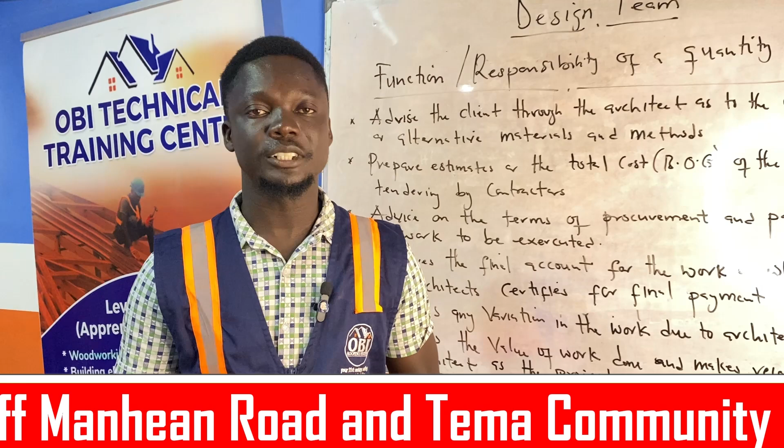We also came to know some responsibilities of the architects, that is designing the building plan and issuing it for preliminary estimates to be prepared. So during the design stage, the structural design, the architectural design, the MEP works, and any other works carried on during the architectural drawing are the responsibility of the architects.

During the selection of a contractor for the proposed project, it stands on what the architect decides. So we realize the architect is the head of the building team, and he decides who to give the project to after the tendering processes, after the quantity surveyor has gone through the tendering processes, interviewed individual contractors, and confirmed that this contractor is capable of doing the project.

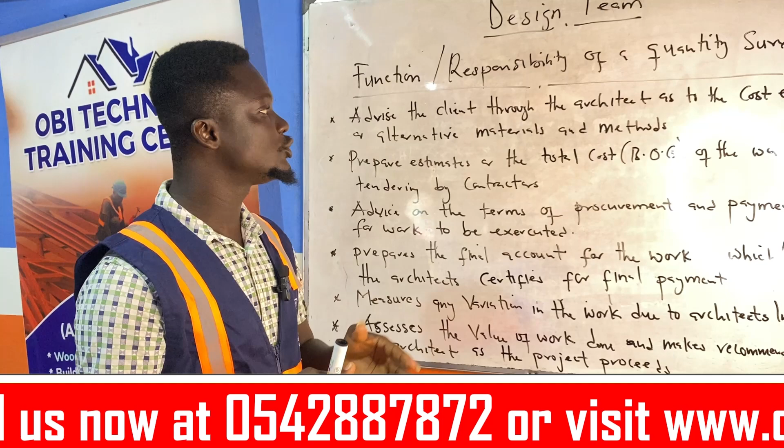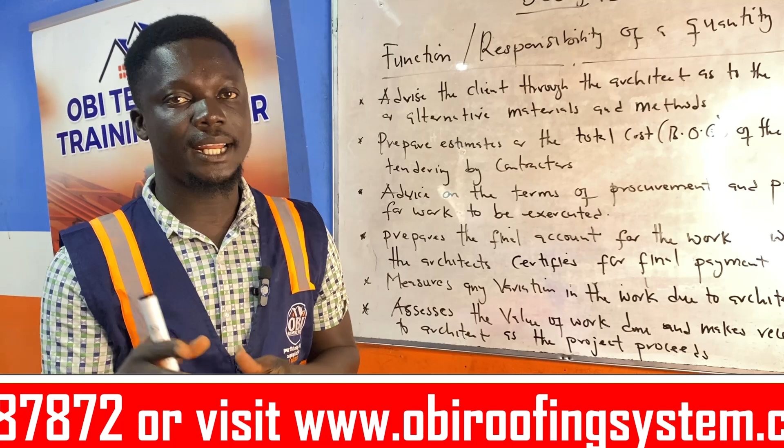Now we are looking at the real deal, the function and responsibility of the quantity surveyor. One, the quantity surveyor advises the client through the architects as to the cost effects of alternative material and method. It means any information the quantity surveyor wants to pass, the quantity surveyor passes through the architect to the client, and it's specifically based on the cost effect.

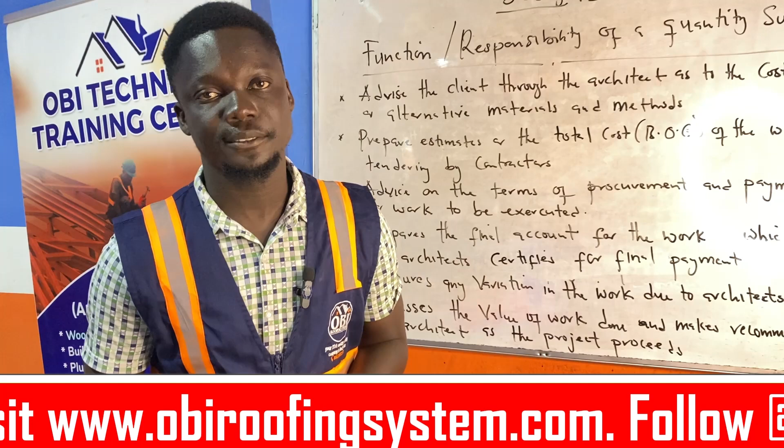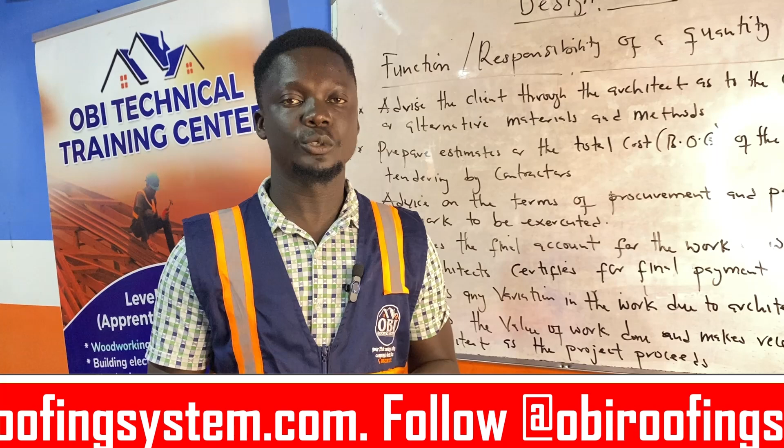For every construction project, there's a cost involved. Definitely you are going to buy materials, one or two, and it involves costs. We are going to buy material, either import it from another country, or it's manufactured here and used here. Through that, it goes through a cost process. We have transporting the material as cost, doing procurement analysis to know the quality and appropriate material for the work. It's all cost effects.

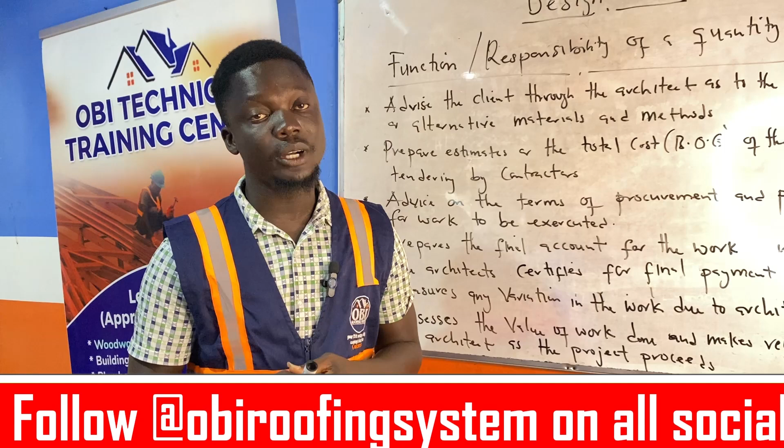One way or the other, we take transport to do the material search on the market, to find the best material for the work, and all those things go through cost, and it's part of the project cost. Those are under the preliminary cost, and it's part of the project cost, but just not part of the main work measured.

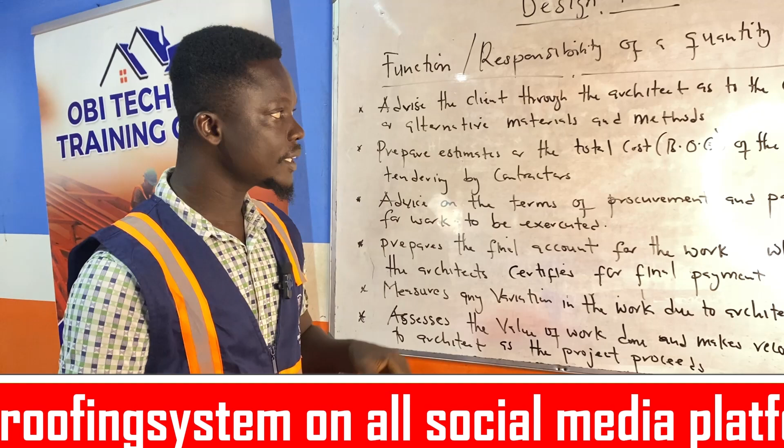So the quantity surveyor is responsible for advising the client through the architect on the cost effects of alternative material and methods. There can be a construction project whereby the architect has designed the whole thing to be a concrete structure. No block work, no other material, metal works, or those things. Pure concrete throughout from foundation to finish.

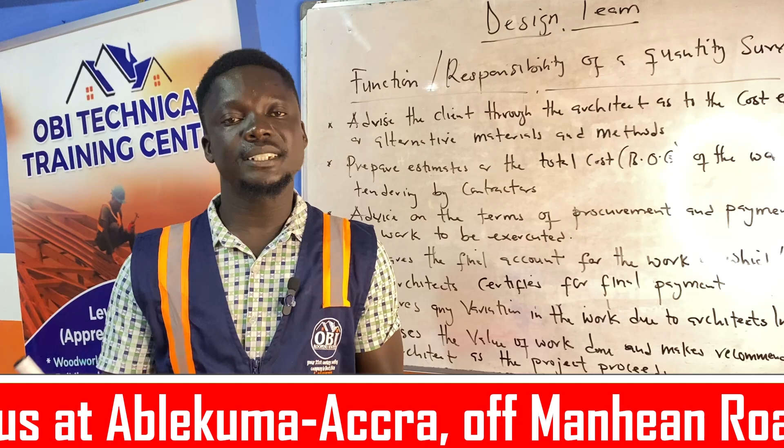By looking at the nature of the work and the material recommended by the architects, the quantity surveyor can sit down and do an alternative material research and realize there's another material that can fit the same functions and requirements of the concrete works, is less expensive, and can be used for the construction project, and we can save costs on that.

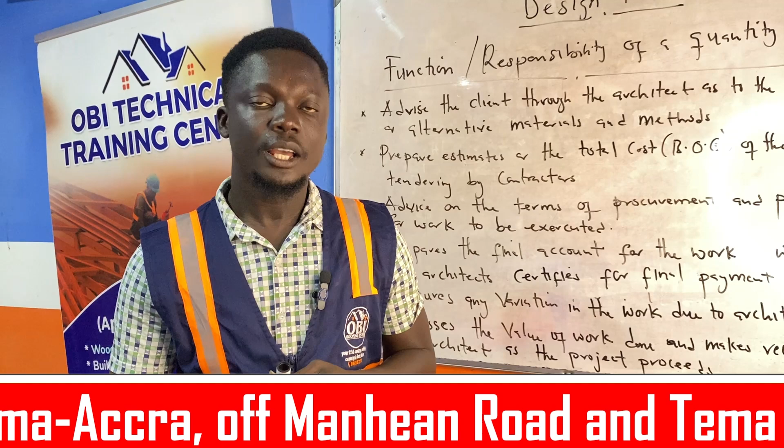So we look at those variations of materials, then the quantity surveyor does a cost analysis on this and brings it out to be approved by the architect and confirmed by the client, as well as the architect, for that material to be used. All these things the quantity surveyor does are purposely to manage the costs and make sure the client does not spend more money or waste money during the construction project.

And it's a very good thing because we help our clients to build, so that we help our clients to also save costs during the construction project and also choose alternative material to substitute the preferred material by the architect, which will perform the same function but will be less expensive as compared to the first one. So that is one responsibility or function of it.

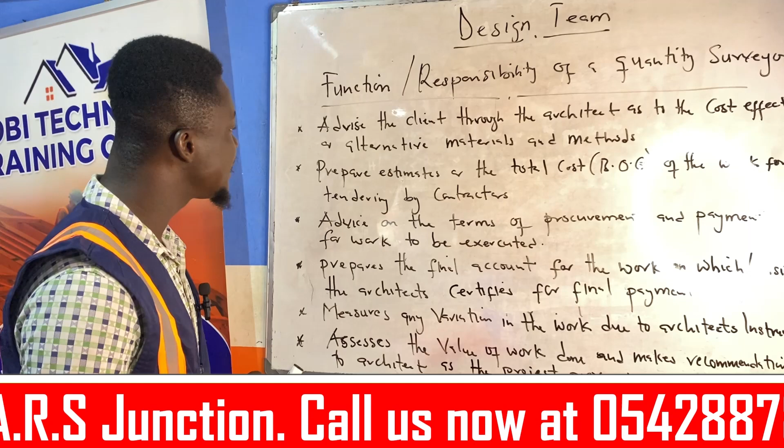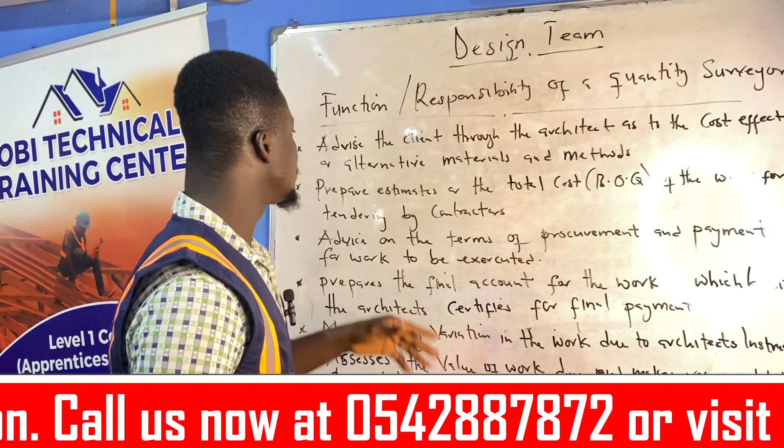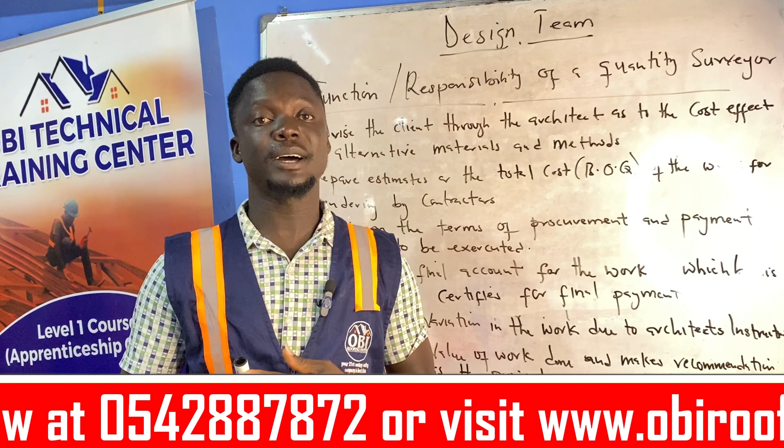Now, they say that the quantity surveyor prepares estimates or the total cost, that's the BOQ, the bill of quantity. The meaning of BOQ is the bill of quantities. So it prepares an estimate or the total cost, that's the BOQ of the work for tendering by the contractor. When we are preparing an estimate, it is prepared by the technical prediction of items of work to be used for the construction project.

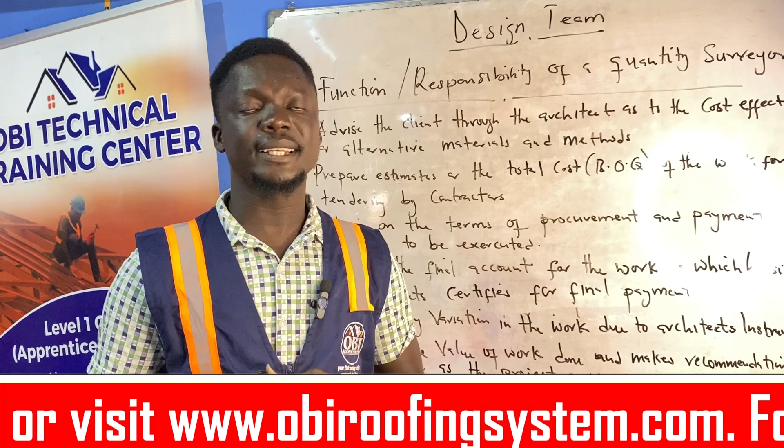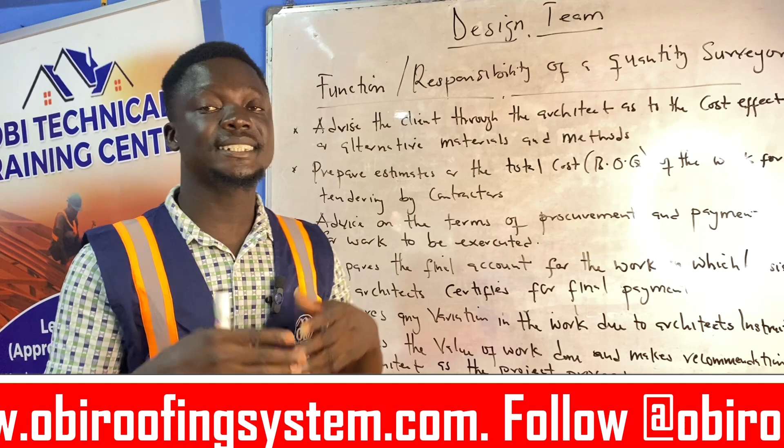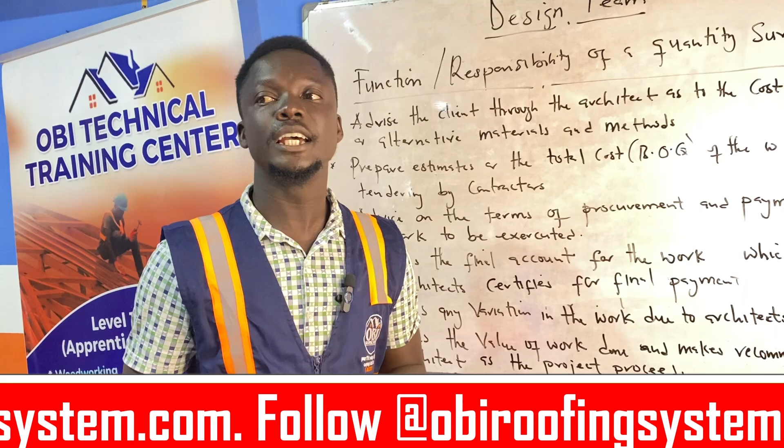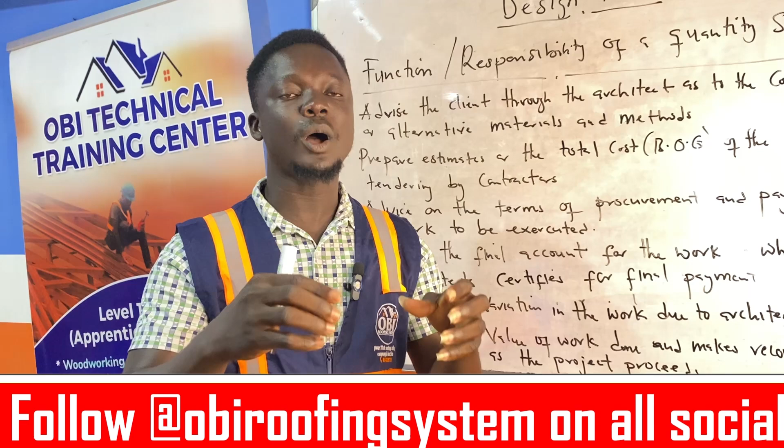But the bill of quantity involves some other items which are not in the estimate stage. Some of the preliminary contents or preliminary bills, like electricity for works, gas for works, transportation, on-site, off-site, money or associated funds related with administrative works, site photographs, site report preparation and all those things are cost items which cannot be found in estimation, but you can find them in the BOQ. So the bill of quantity gives us the total cost of the project, including the preliminary costs as well. But the estimate depends entirely on the exact work to be measured, or the actual measurement we picked from the drawing, and we do an estimate for it.

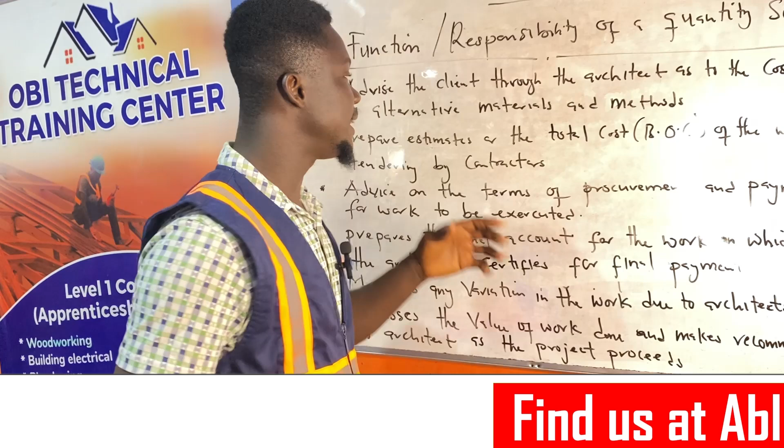And we do an estimate also to make a price analysis or rate analysis based on labor, material, plant, profit and overheads, that's the P&O. By the BOQ, we are able to get the estimate in it, getting the preliminary estimates, getting the estimate for the rate analysis to prepare the BOQ to get a rate or cost of an item.

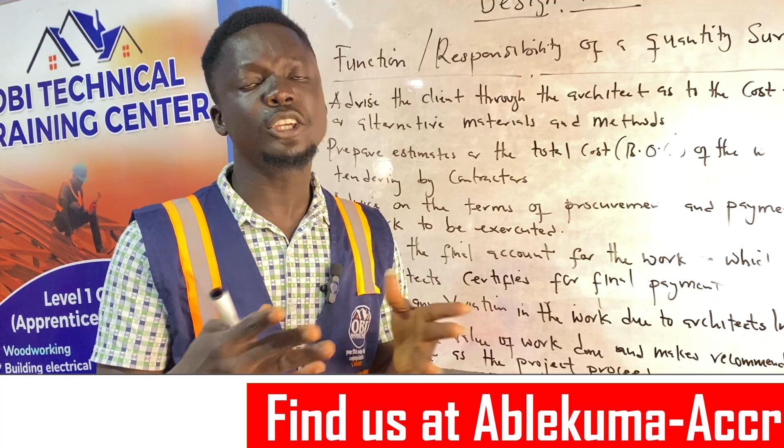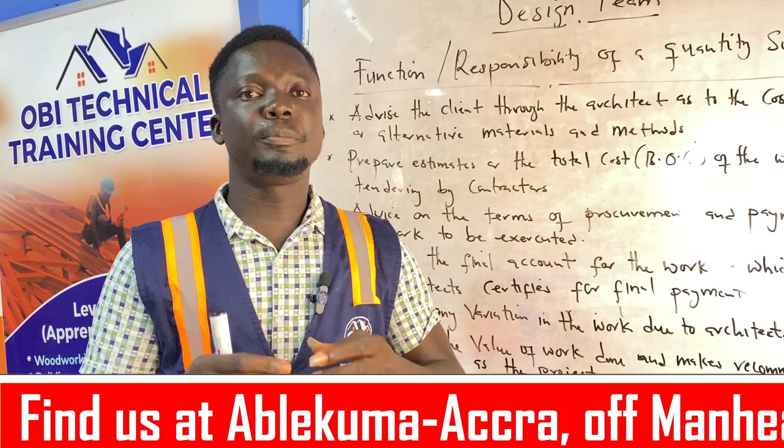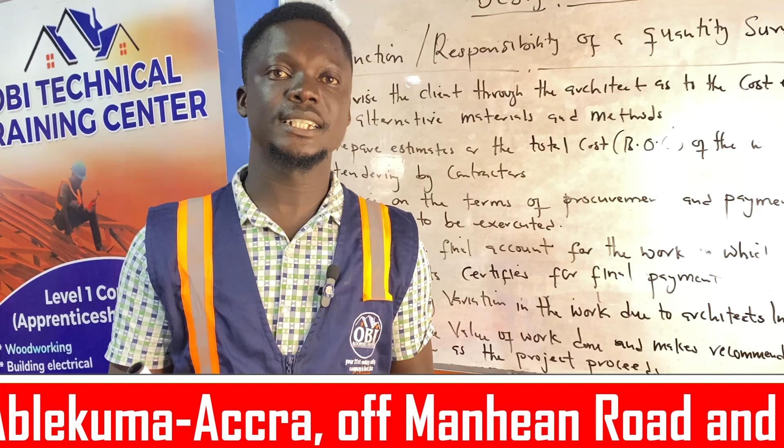Example, let's say the cost of 1 cubic of concrete. The concrete is made up of fine aggregates, coarse aggregates, a binder, either with an admixture or not. Now we prepare an estimate on the material cost, then we prepare an estimate on the labor for casting that cubic of concrete, and we prepare an estimate on plant or tools and equipment to enhance the work to be executed. Then we prepare an estimate based on the profit and overheads that will be obtained on the casting of concrete.

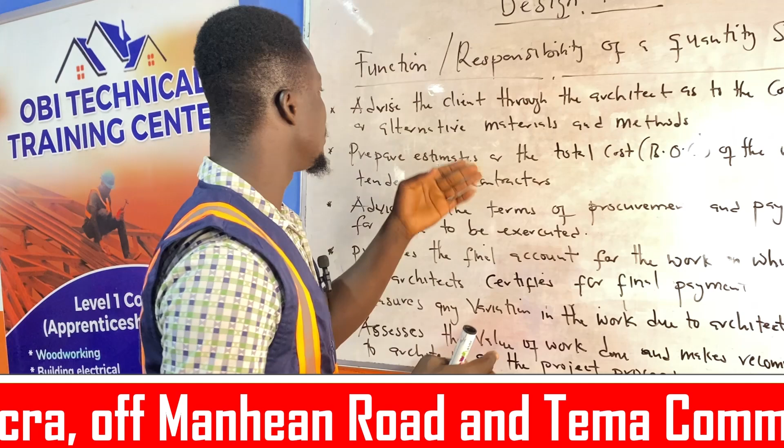I realize that there are two things: the estimate, and the total cost, that's the BOQ of the work, tendering by contractors. So after the architect has designed the building and the drawings are ready for contractors to tender, the quantity surveyor will sit back first and prepare a preliminary BOQ that will be used to cross-check the other BOQs that will be prepared by the contractors, or submitted by the contractors for tender evaluation purposes. So the quantity surveyor will sit, prepare the BOQ, and know the total cost of the project from foundation to finish.

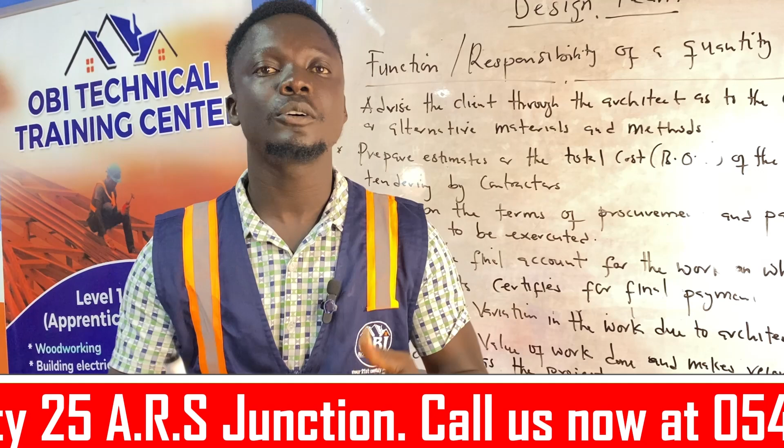Then after that, they give opportunity for other contractors to tender, and these contractors also have their individual quantity surveyors. After they get the drawing, what they will do is also go through the drawing and prepare a BOQ to be submitted. So when the BOQ is submitted by the contractor, the quantity surveyor is to analyze or evaluate the BOQ which is submitted by the contractor, and compare it to the preliminary BOQ prepared by himself, on the client side, in order to do the selection of the contractor.

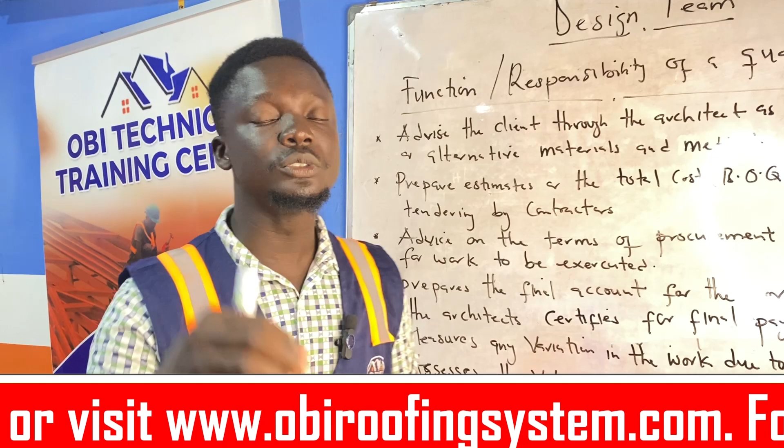So those evaluation and tendering processes will be assessed by the QS, the senior QS, the architects, and other engineers who are part of the building team. Then through that, they will be able to know the qualified contractor who is qualified to take up the job.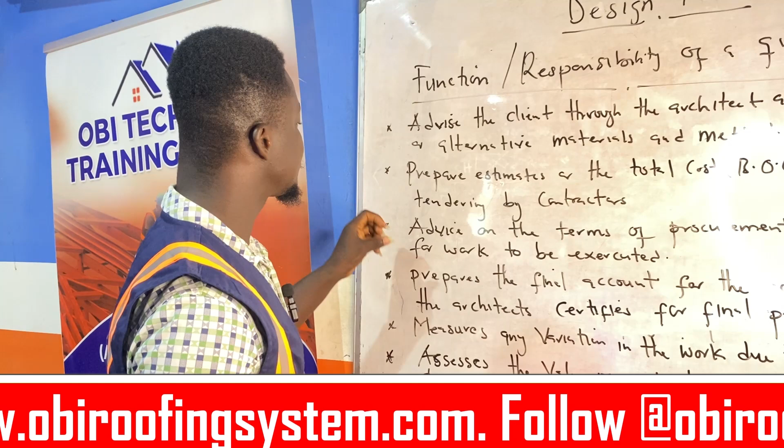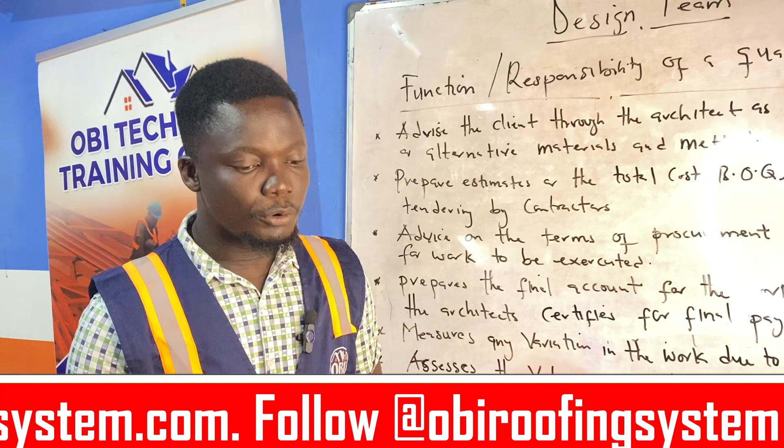Then now let's go to the next one: the quantity surveyor advises on the terms of procurement and payment for works to be executed. The terms of procurement. Procurement in the construction industry is very broad. We procure contractors, consultants, we procure materials, we procure plants and equipment, tools, and everything that goes into the construction project.

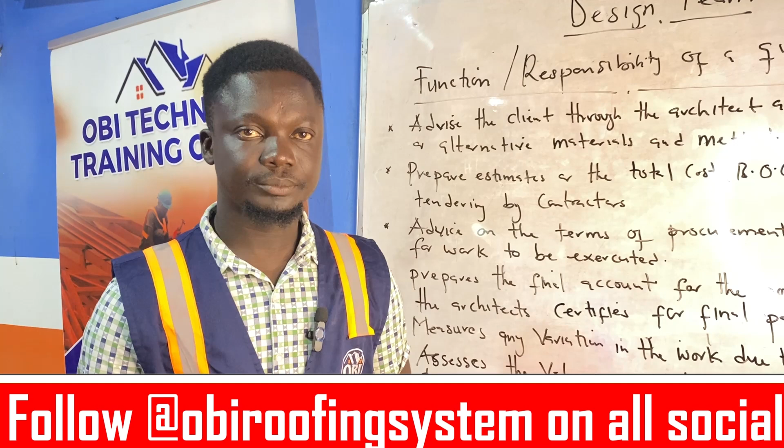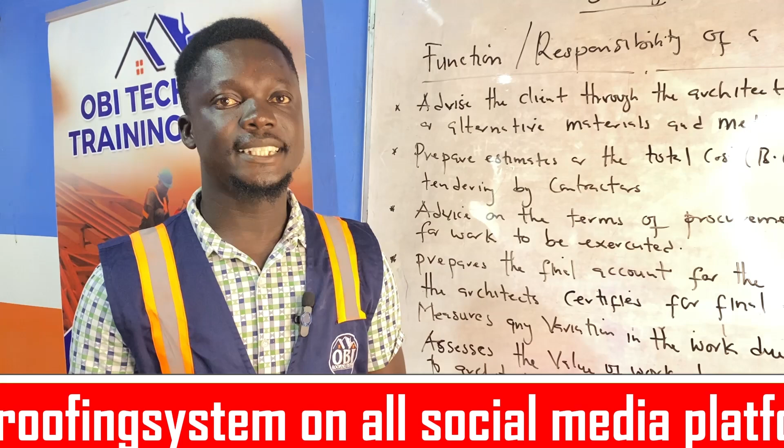So after we procure the consultant who will be on the project to stand at the side of the client, and also to protect and make the client safe, not to bear extra costs. At the same time, we procure the contractor during the tender evaluation process in order to get the required contractor for the work.

Then afterwards, we procure materials. That is why we do our market search, in order to find the right quantity of material, the right costs, and the right quality of material that is needed for the construction project.

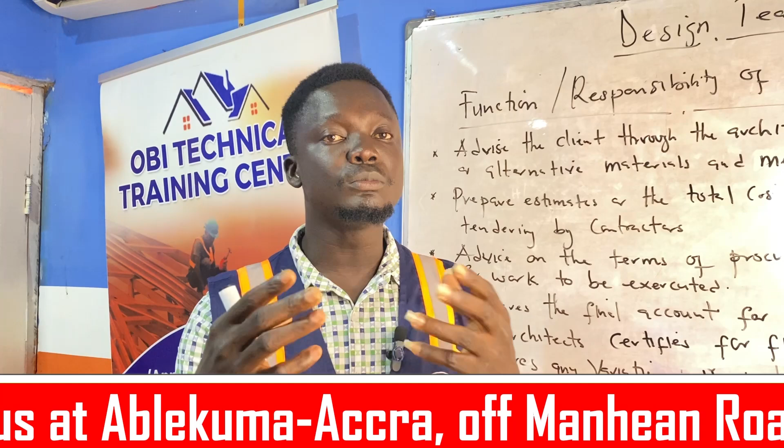So we procure all these things, then we procure the plants and equipment that is also needed. Make sure that we go in for efficient plants and equipment that can accelerate the work for it to move on, so that it will not bring about any cost effectiveness issue on the project. So advise the terms of procurement that will be used.

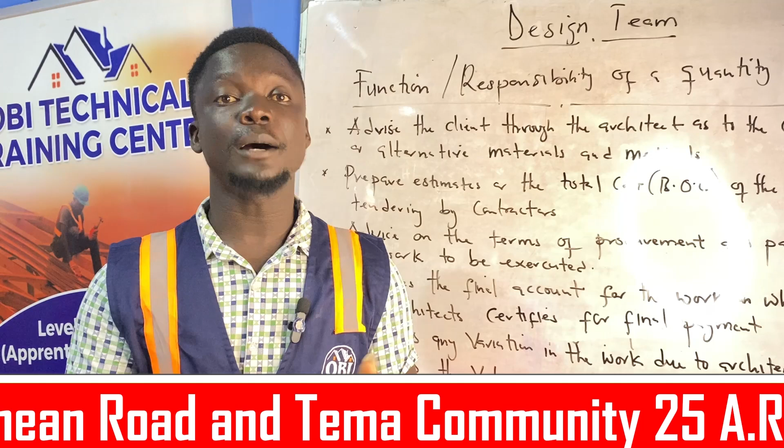Then also the payments for the works to be executed. Maybe with the payments, the quantity surveyor can come in and say, okay, we are going to do the payment in 4 terms. So we're going to do the first payment, that's about 25%, for the initial mobilization before the project is started.

Then they will make a condition that for the first 25%, the initial mobilization, the money is supposed to be used to complete the project to a certain percentage. Sometimes it goes beyond 25% of the total work done, or sometimes it's exactly 25%. After that, they do another mobilization for the second stage, then a third stage before the final payment is done.

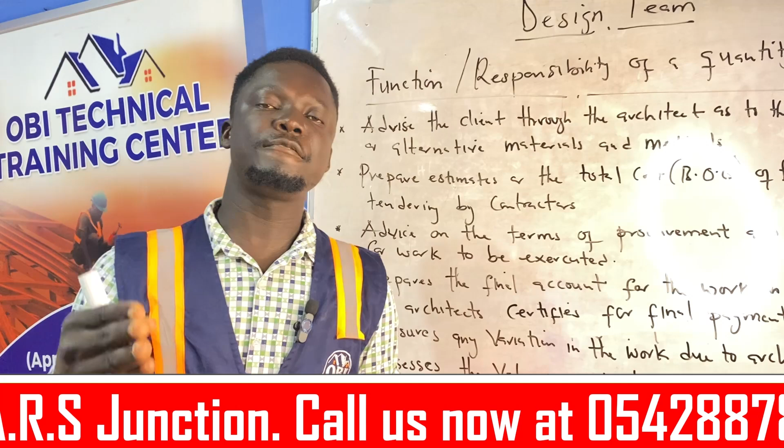Through all these things, there's what we call retention. For every payment made, they retain 10% of the mobilization given, and that is to cater for LAD, that is liquidated ascertained damages.

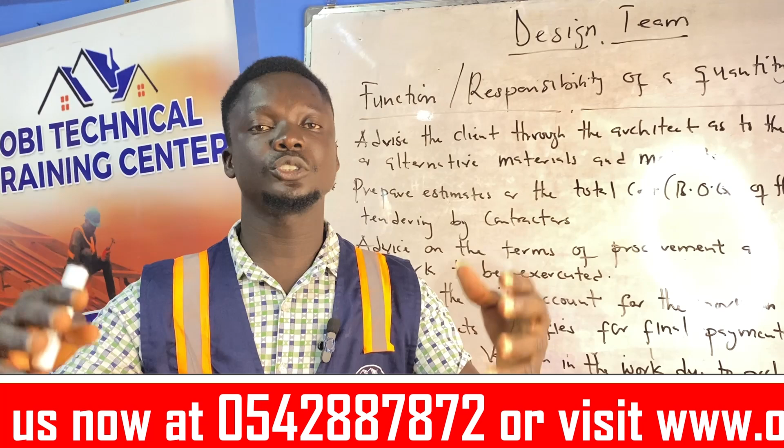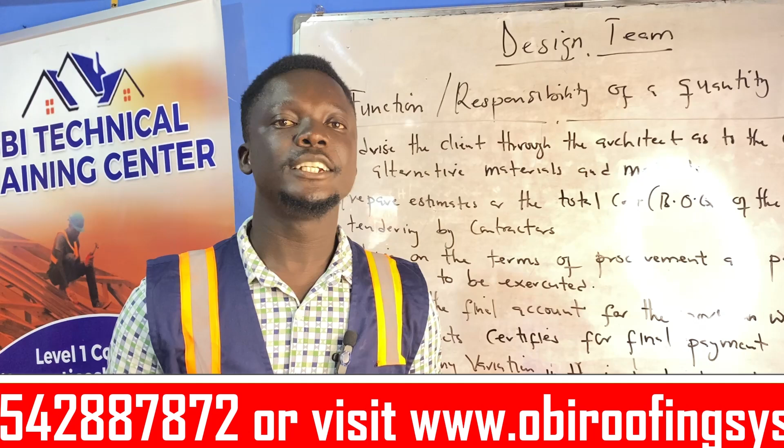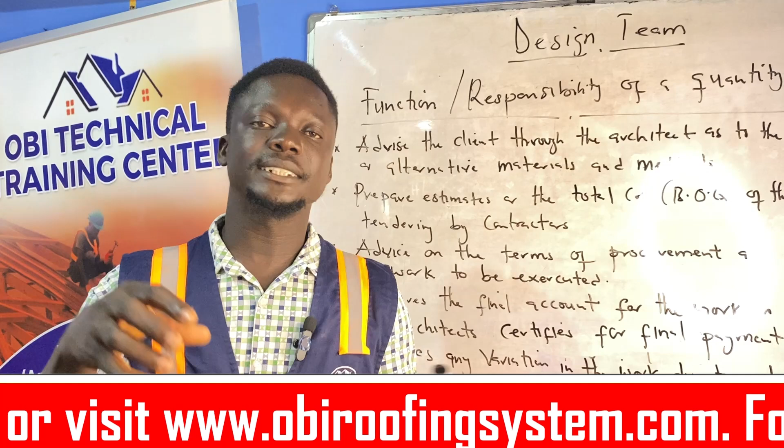So anything after the contract or project has been executed and the keys handed over to the client, we give a duration of about 6 months. If there's no problem or defect on the building, those retentions will be recovered back to the contractor. But if there's any defect liability, damage, or defect on the building, then that retention will be used to cater for those repair works.

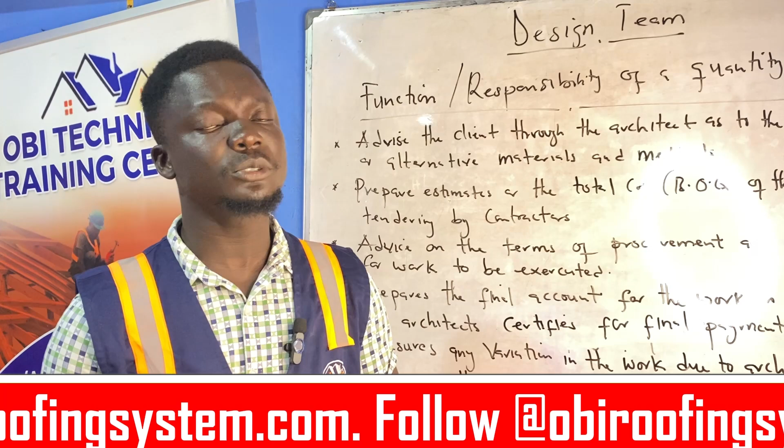Then after the 6 months, the remaining money will be paid back to the contractor after executing the work. So the procurement terms, the payment terms, and all those things are very important, and it's necessary that we adopt them in our daily construction projects.

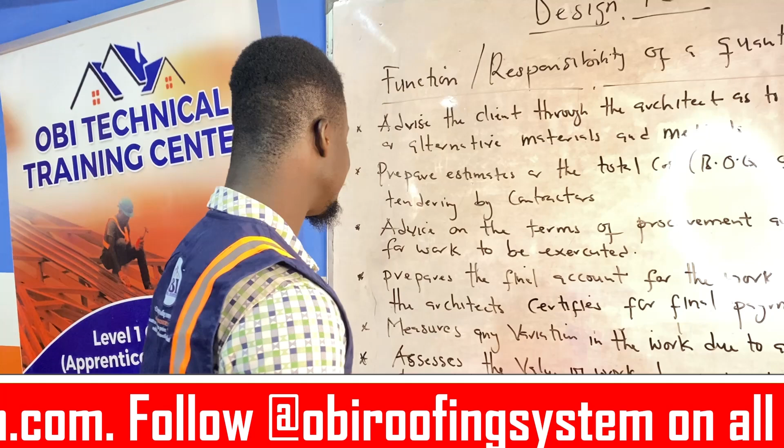Now we go to the next one, which says prepare the final account for the works, on which basis the architect certifies the final payment. So let's look more at the final payments when it comes to mobilization: the first mobilization, the second mobilization, the third mobilization, and the final mobilization.

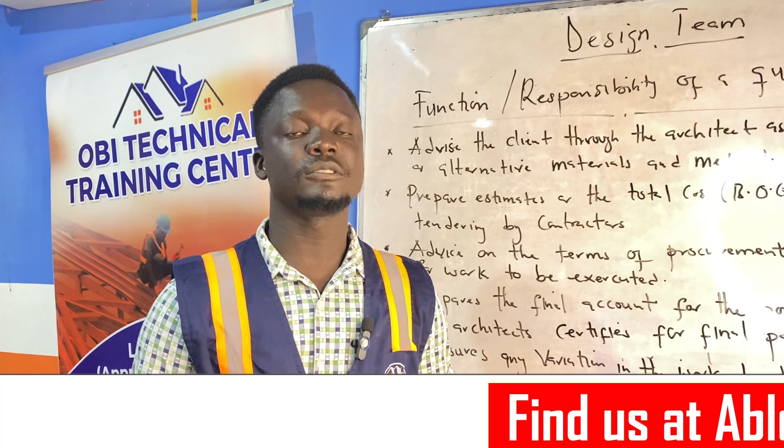On the final account, we're able to do all the accounts on the amount of money spent on the project, and we check it against the total work done so far, so that we make sure we are on track, that the work matches the amount of money paid to the contractor during the execution of the work.

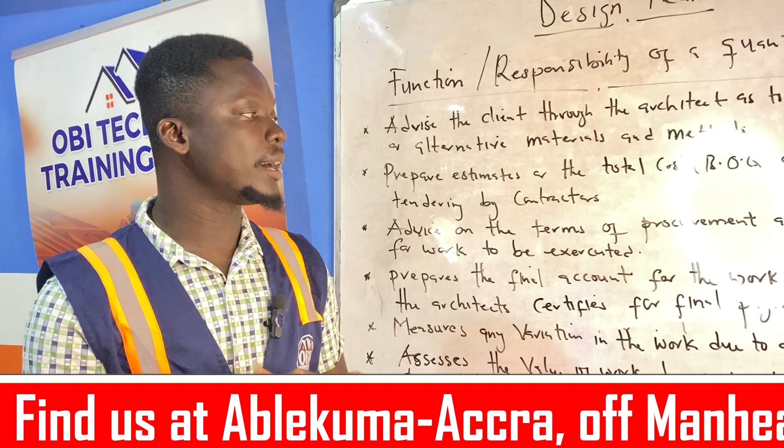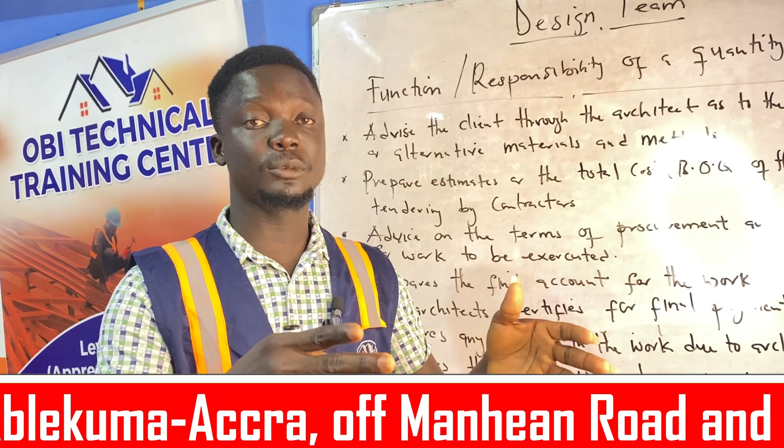So the cash flow methodology that will be used, the cash flow expenses that will be made, everything will be gathered by the quantity surveyor. Then after that, you prepare the final account document to the architect stating that, so far so good, the contractor has been able to do the work to the final stage, and per the final account, this is what we have to pay.

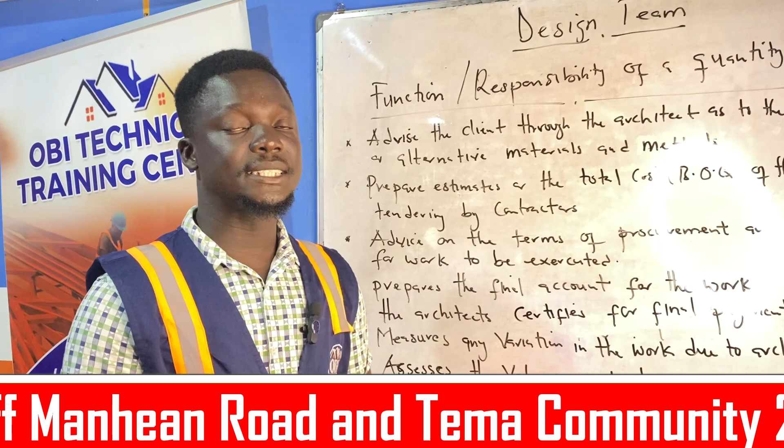Then we prepare a certified final payment document. Sometimes in the cost situation, we call it the IPC, that's the Interim Payment Certificate. Yes, so with this we depend on that.

Then the architect certifies it for the final payment to be made to the contractor on completion of the work, minus the retention for the LAD, that is the liquidated ascertained damages. So after the 6 months period, they can pay the retention back to the contractor. Then we close contracts. Now let's look at another thing.

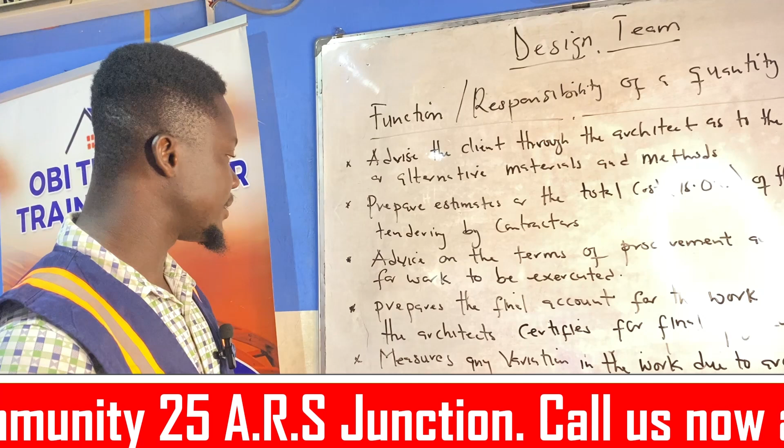They measure any variation in the work due to the architect's instruction. A drawing is prepared for a project to be taking place.

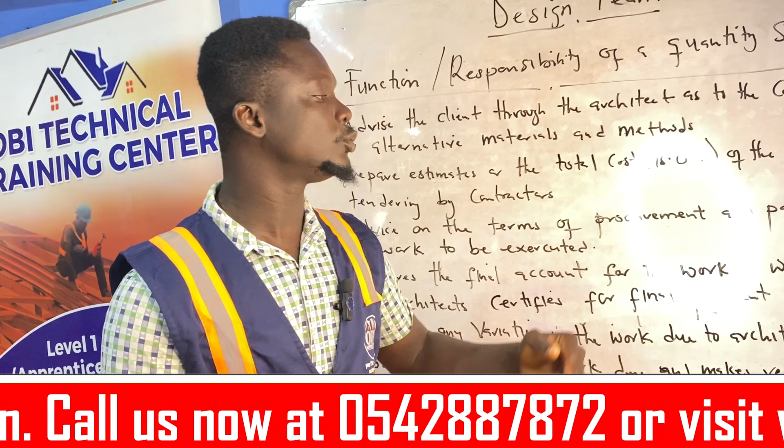During the execution of the project, the client comes to the architect and says, 'I wish this part of the building, also the hall, could be extended a little bit, by 2 or 3 meters.' Initially, when the bill was prepared, it was based on the measurement on the drawing. But during work execution, now the client is requesting an extension of the size of the hall, which will cause a variation in terms of quantity and valuation cost.

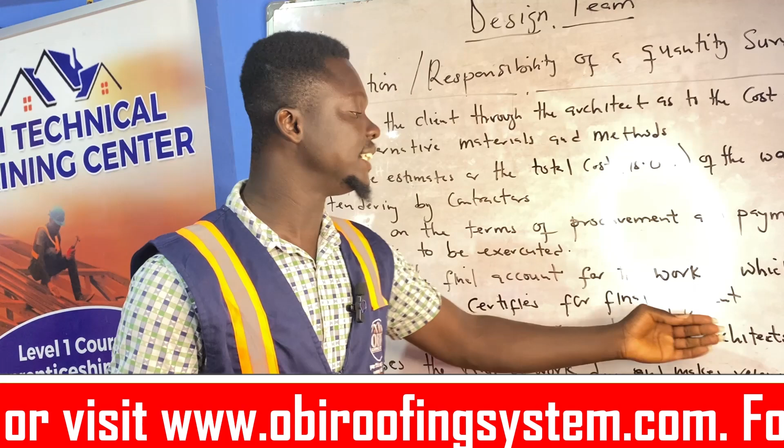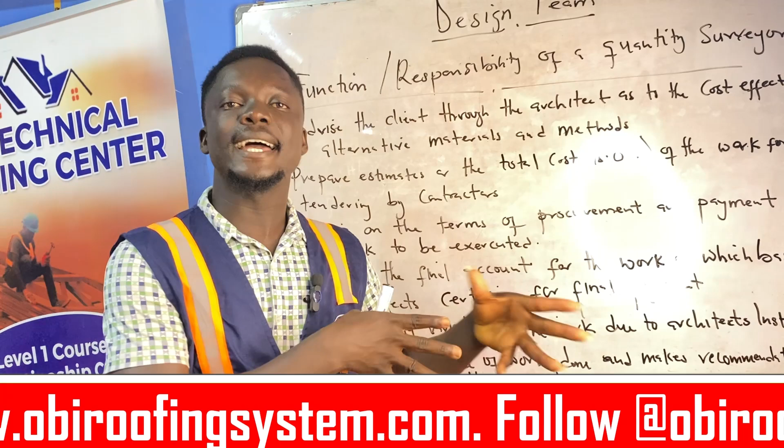So the contractor will come to the quantity surveyor, drawing attention that if there's any change in design from the architect, or from the architect's instruction by the client, then a variation must be prepared, and based on that variation, we value it to know the cost of the extension. So we go to the site to measure the variation, that is the extension, and get to know the area we are going to extend for the work.

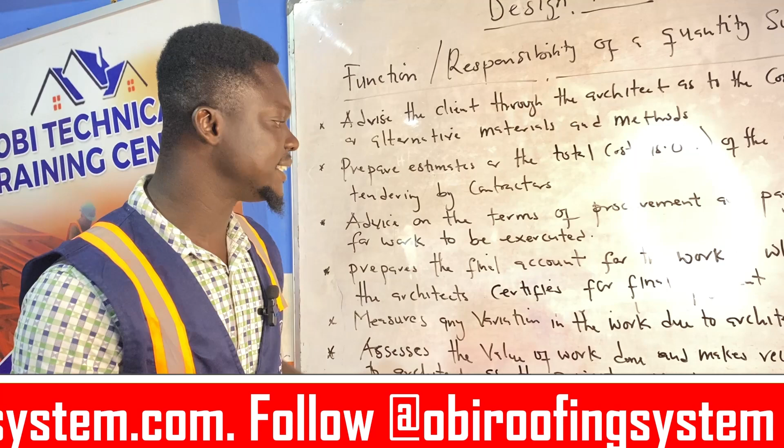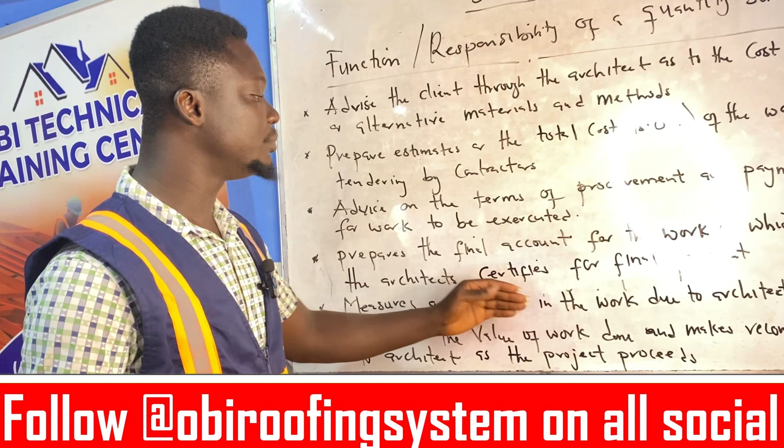Then we convert that quantity into valuation, monetary funds. Then that can be paid as a variation amount to the contractor during execution of the project. So we measure any variation in the work due to the architect's instruction.

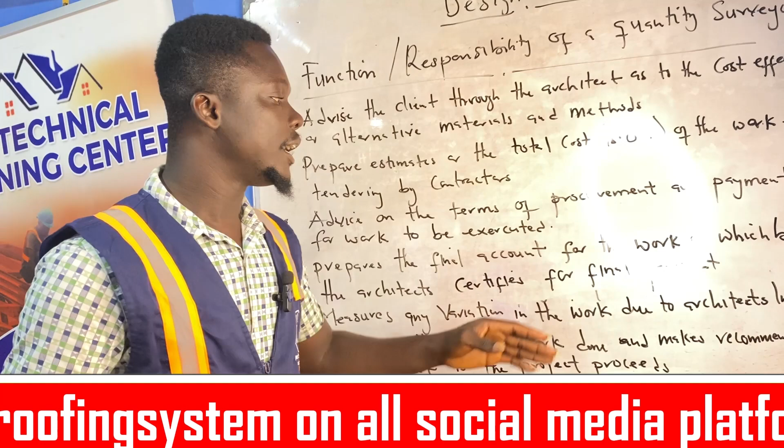And the architect's instruction is not just from the architect, but also from the client, because the architect is the mouthpiece of the client. Whatever the architect says is directly from the client, and the architect is issuing that instruction for the contractor to follow.

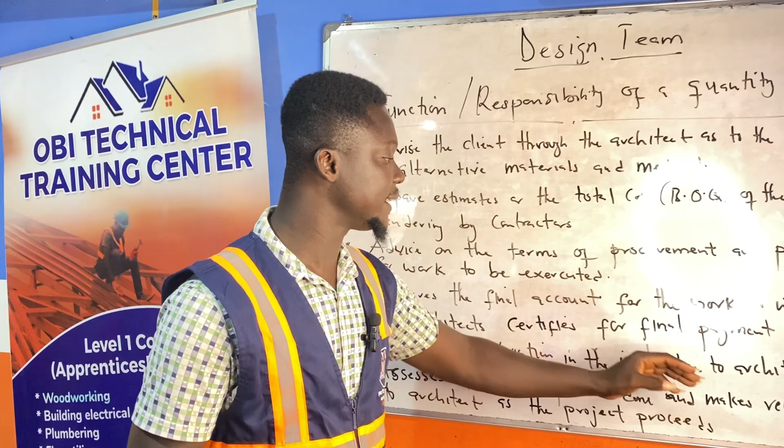So those variations are very important. They need to be taken and evaluated on the work so that there will not be a conflict between the contractor and the consultancy team.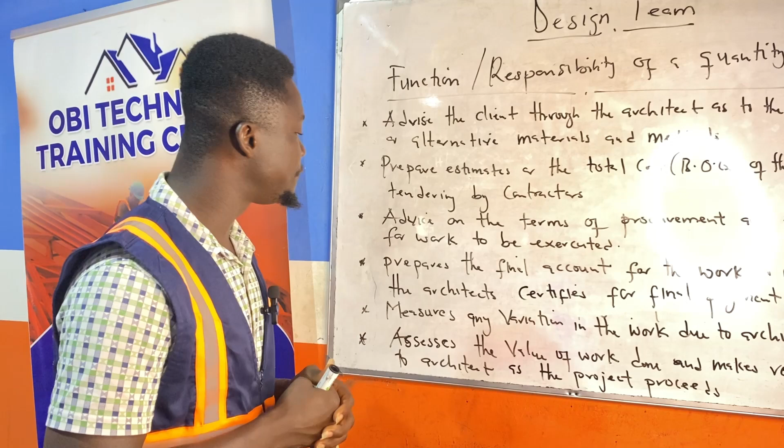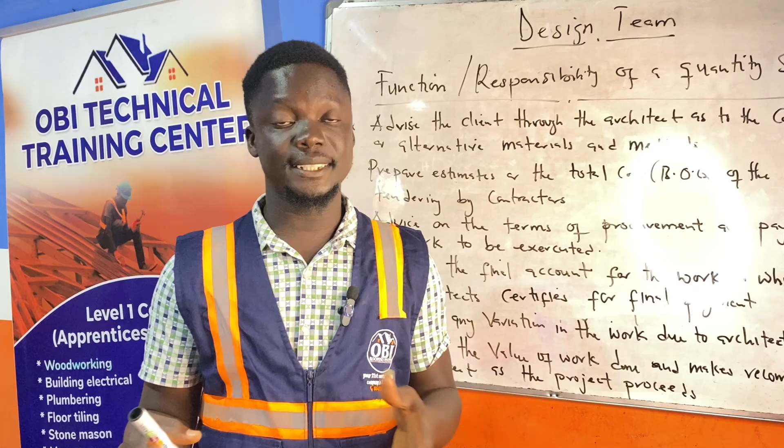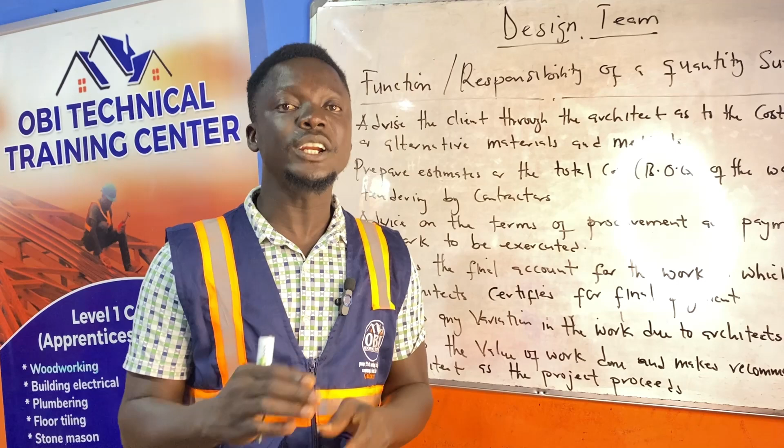Now let's look at the next function: assess the value of work done and make recommendations to architects as the project proceeds. So as a QS working for a consultancy team or for a client, at any stage of the work, the QS and other engineers are responsible for going to the site, assessing the work done, and making sure the work is done according to the design, the specification of the engineers, the measurements, the levels, and everything.

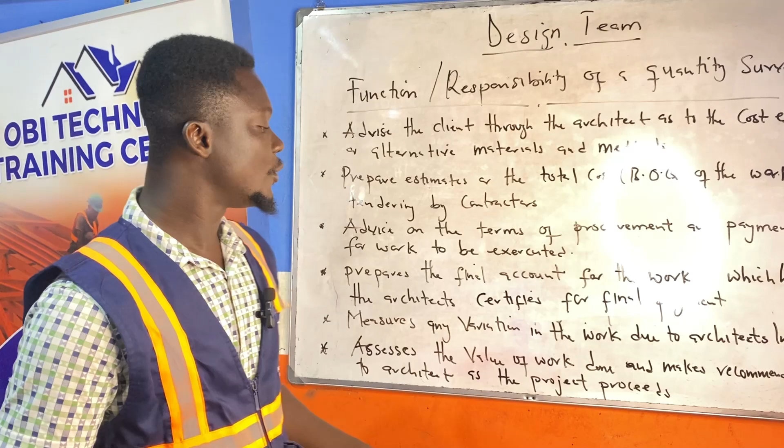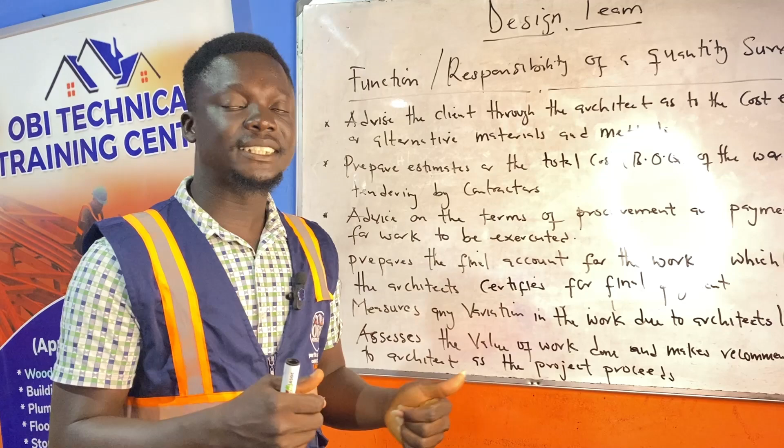Then he'll give a final report or recommendation to the architects. They do this at every stage. At the foundation stage, they will go and do those checks, prepare a report, and confirm that all works are being done according to the instructions of the engineers, the architect, and everything. So it gives a check-up, then the next stage can proceed, which is the superstructure.

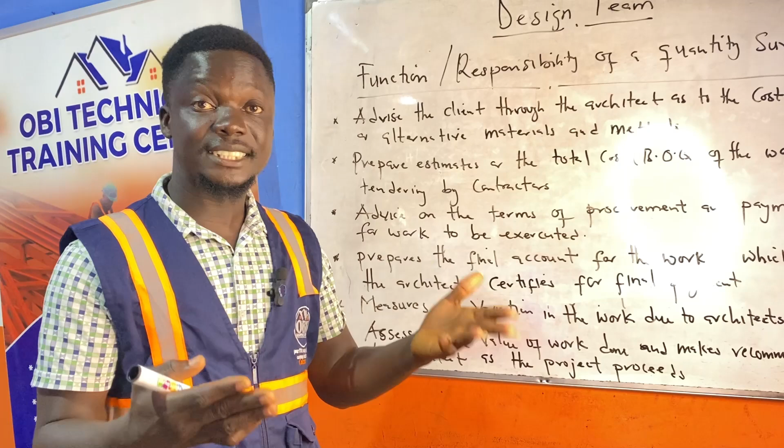As the project is also ongoing, they will check similarly at every stage. Every component, every element, whether it's block work, concrete, or steel works, every part of it will be checked.

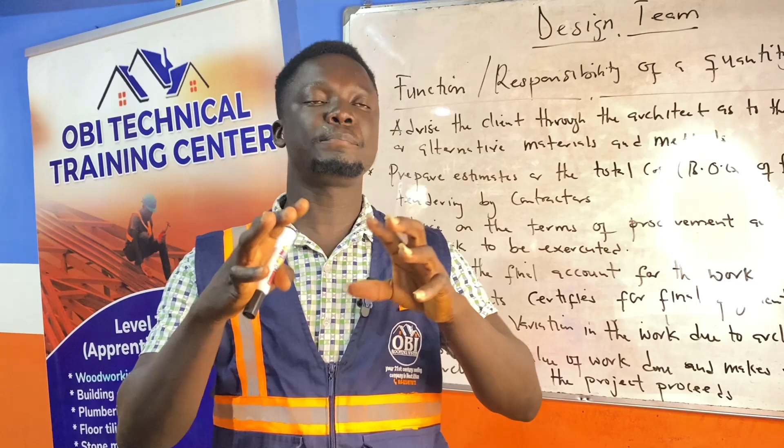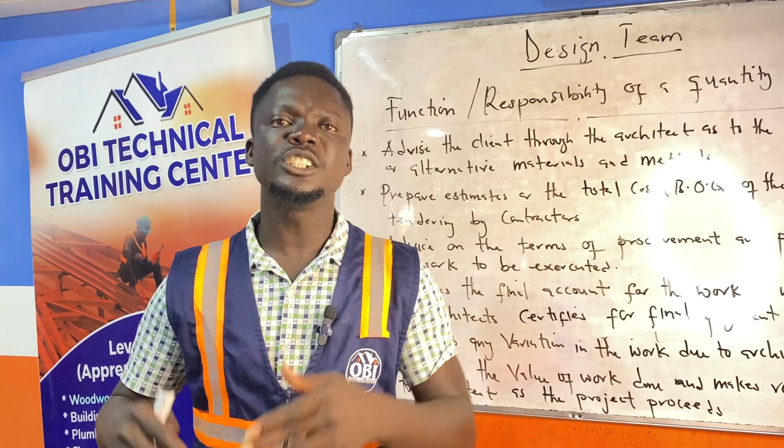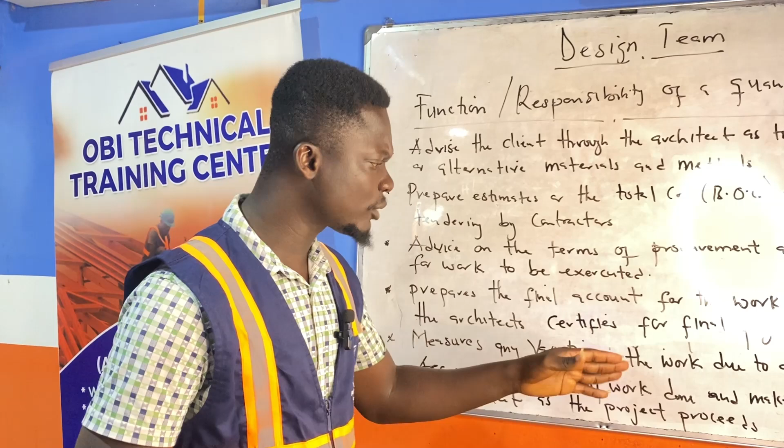Even in the aspect of concrete, it's the responsibility of the consultancy team to make sure the strength of concrete used by the contractor satisfies the engineer's recommendation. Sometimes when you look at the drawings, we have what we call the engineer's instructions or recommendations, specifying a certain grade of concrete, certain type and size of reinforcement. All these things are checked to make sure the contractor has done the work according to it, and that the contract is proceeding well to final execution.

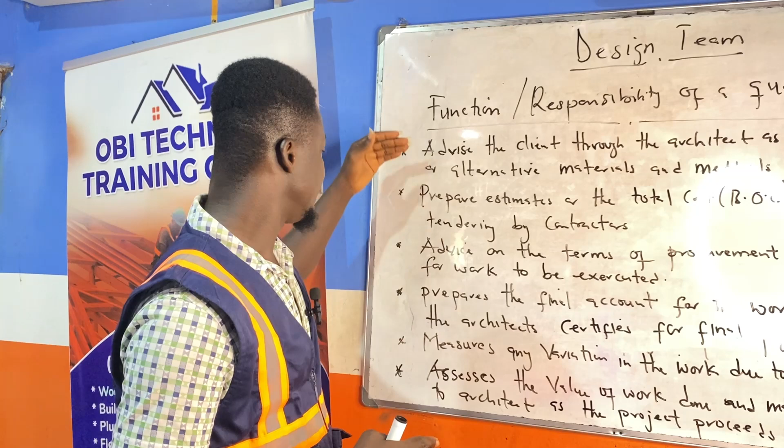There is more to it, but today I'll end my lesson on these 6 parts of the responsibility, or the functions, of the quantity surveyor.